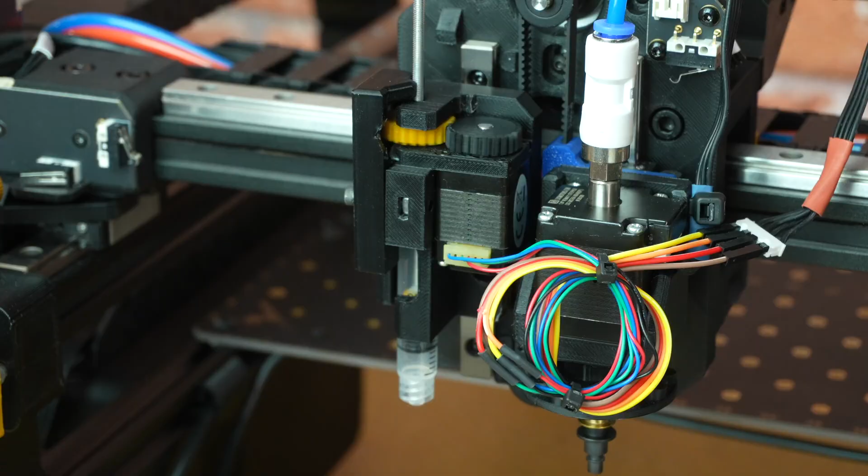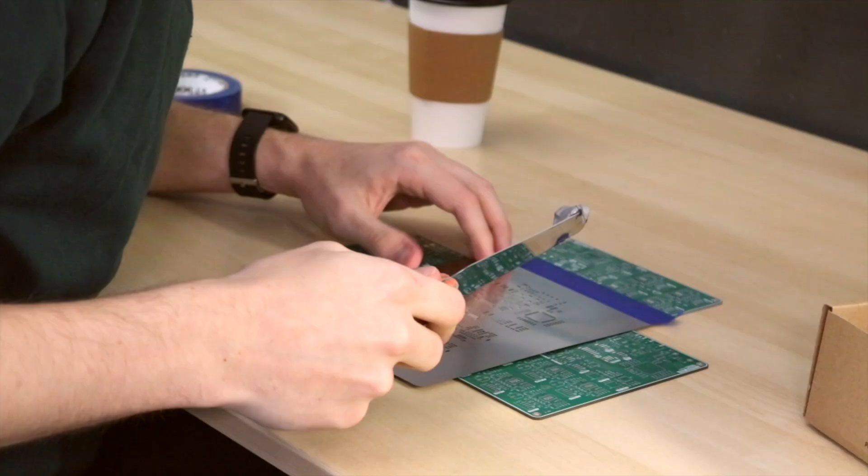I developed a tool head for the LumenPnP that can apply conductive ink automatically, but I think the most useful thing to dispense with this head is solder paste. Solder paste is tried and true for decades, the main way you should be connecting components onto a PCB. If I can adapt this tool head to work with solder paste, I can almost completely automate the PCB assembly process.

The last one I designed was okay, but it didn't have nearly enough oomph. The stepper motor that I used was pretty small. I only used a 1-to-1 gear ratio on the gears that actually drive the ink. Ideally, I give a little bit of a mechanical advantage here, giving myself a little more torque for actually extruding. And solder paste is way more viscous than this ink, so I'm gonna need all the power I can get from this. But I did learn a lot from making this head, so let's make one that's a little bit beefier and is gonna be able to extrude solder paste.

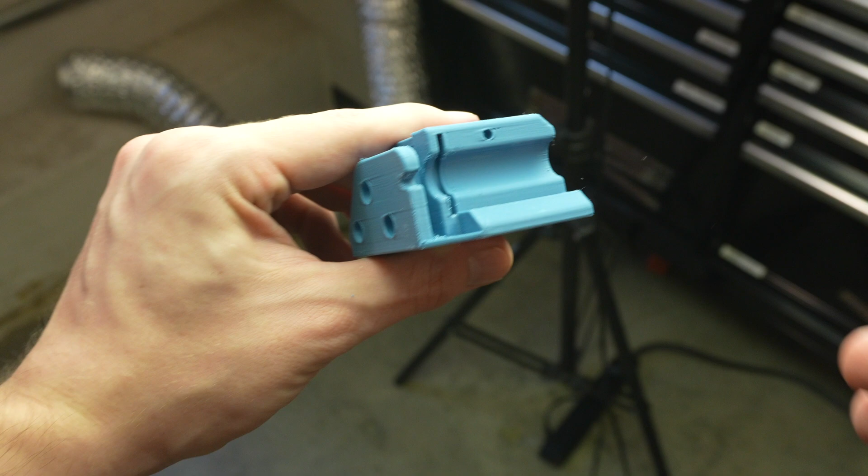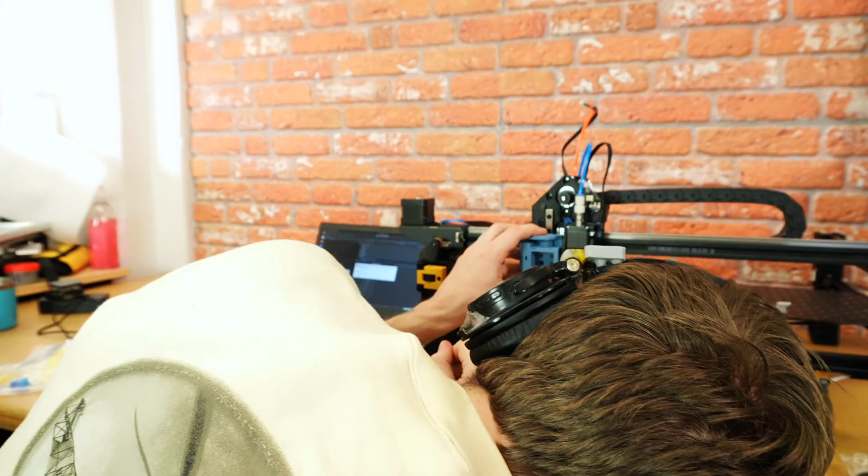Am I an idiot? I'm an idiot.

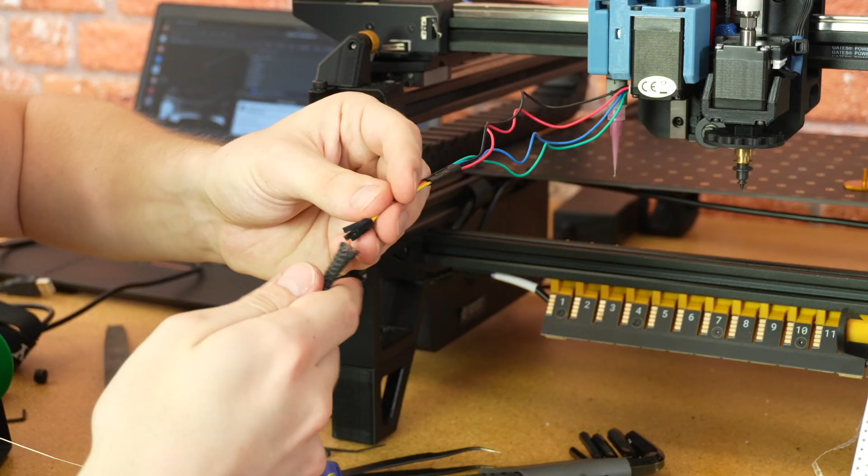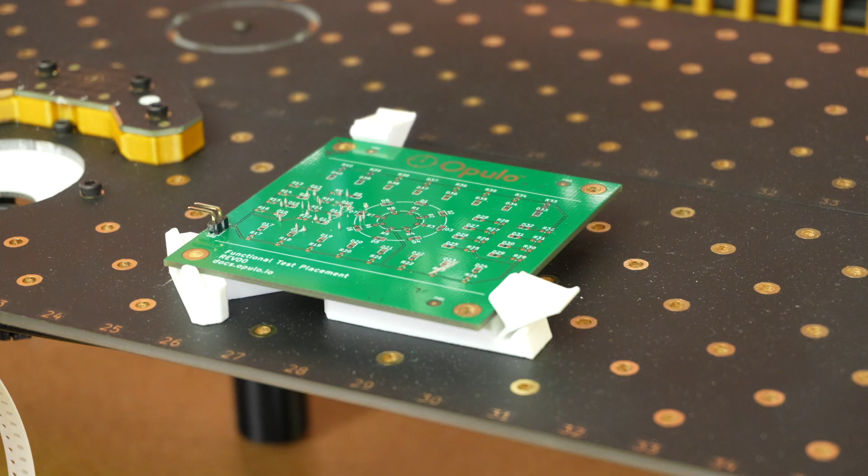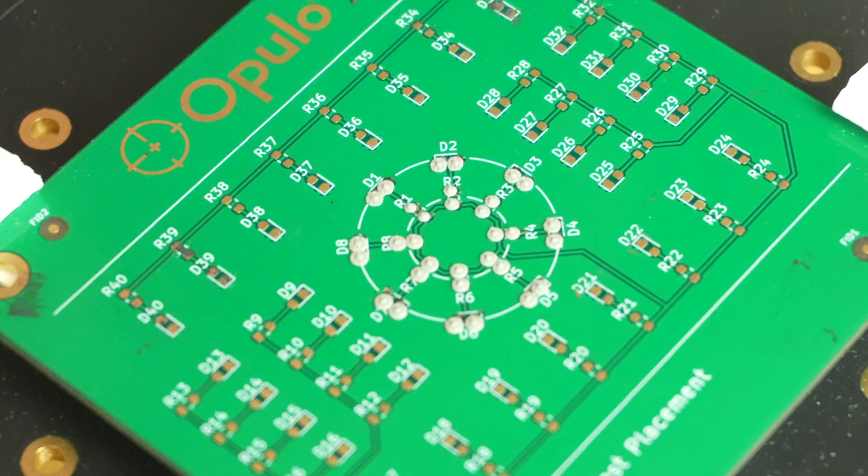And it's offset by a lot. Wow. That's so cool. Just need to extrude less, and I think I need to prime more because R1 is that first one that I'm doing, and that one looks closer to good, so I think I need to hit steady state earlier with my prime, and then as I'm actually extruding, I just need to be quicker about it.

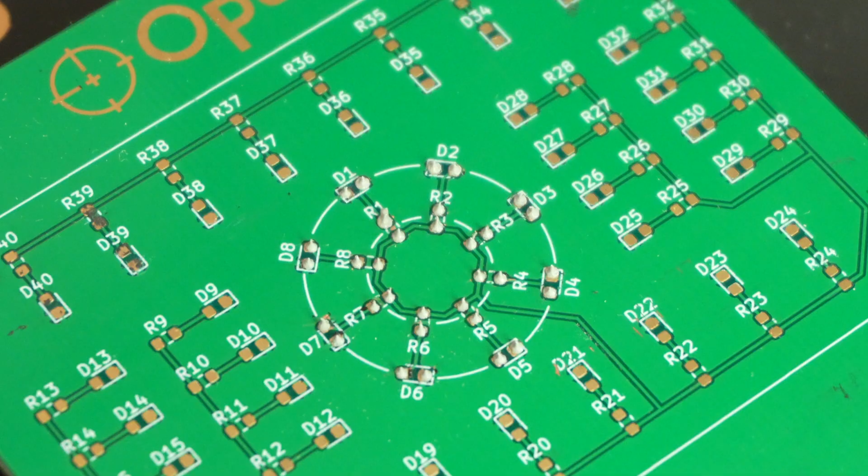Holy crap. That's it. After a bit of process tuning, it's pretty consistent. It's a really good thing I added that mechanical advantage and a bigger motor because it was fighting a little bit at the beginning. I had to up the current just a bit from the default current that we use for the Lumen on its normal motors, but still well within the boundary of what this motor can handle. And the mechanical advantage with the gearing helps a ton too. So now it's no problem to extrude this paste out.

I'm using Loctite GC10, which, by the way, is the best paste you can get. Room temperature stable, lasts for years as long as you don't expose it to a lot of air. Great reflow. Highly recommend. And it extrudes it out great.

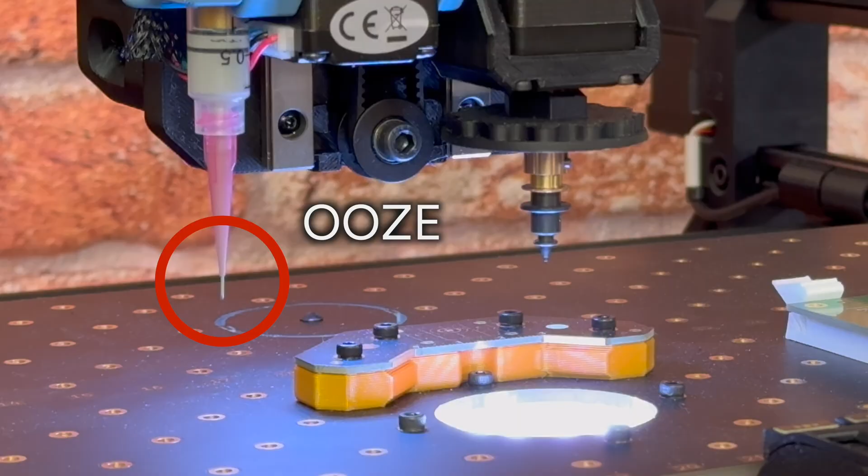I wasn't able to get all the air out of the syringe when I was loading it, which is really frustrating because when you have a little bit of air in the syringe, when you compress it, the air will actually compress and it acts kind of like a pressure spring. So even if you stop driving the plunger down, that air will still put a little bit of force out on your paste and you'll get kind of like a drip, an ooze that you'll see in a 3D printer nozzle. And the less air you have in the syringe, the less of that effect you get.

So what I'm doing right now is I'm just kind of purging the nozzle to start. I extrude a whole bunch, I have some come out, I clean the nozzle and I let it delay for a little bit to let most of that pressure work its way out. And then I move to each position, extrude a little bit, wait just a second, and then I go to the next one and I kind of have this running active pressure in the syringe. Ideally, it's a little more deterministic and there isn't this spring variable in my equation of calculating volume based on extrusion distance. That would be nice.

Eventually getting these syringes packed solid with solder paste I think will help reduce this, and then it can be tuned way more accurately and consistently. But this is just me trying to shove a bunch of paste in there. It's not gonna be that great.

So the next logical step at this point is we put parts on it afterwards, and then we reflow it all in one fell swoop. I'm imagining a little Python utility that you can drop your KiCad file into. It pulls out all the positions, and then it gives you a little script you can run for your Lumen to automatically apply your paste. So if you wanna really quickly iterate on getting some boards in, you don't wanna have to deal with a stencil, getting it aligned, doing all the squeegee stuff. You just slap it on your Lumen, it puts all the paste out on it for you. Bob's your uncle. That is just the coolest thing. That is the coolest thing.

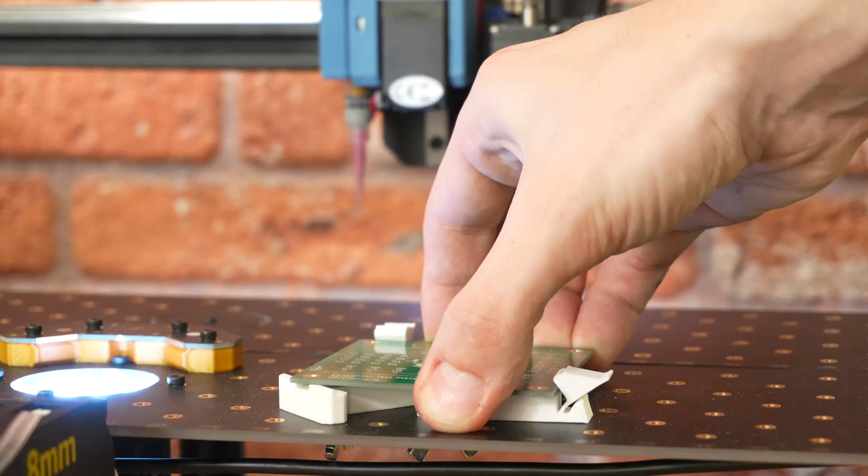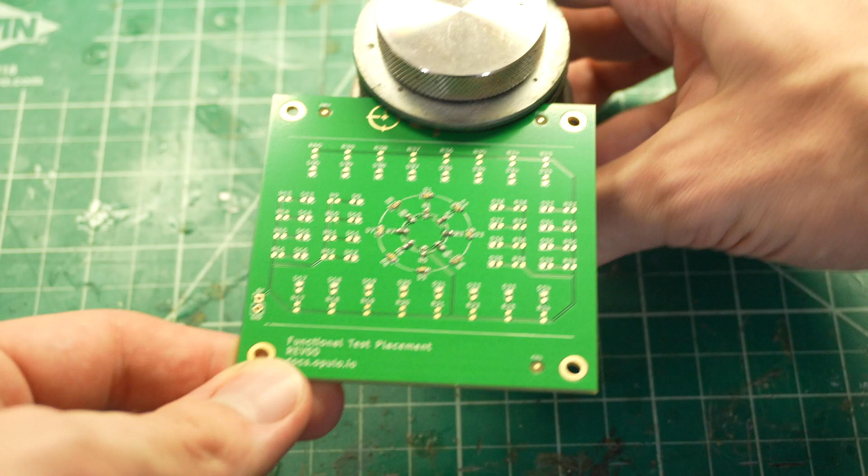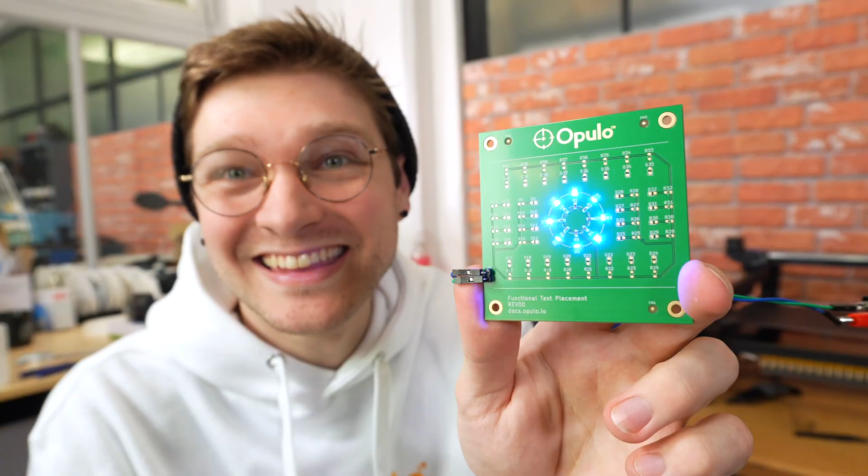This is now what I feel like is the culmination of a 3-video arc. This is a PCB that was fully pasted and placed on one machine with parts that are not coming off. They are soldered on with production solder paste. With some tuning of the process and some software to automatically generate the G-code, this is fully automatic paste and place. One machine. You can get PCBs made in 24 hours.

There are some caveats in that now there's only one nozzle, but that's not the end of the world. It's pretty easy to just swap out a nozzle tip halfway through the job, and it's still way more hands-off than having to deal with the whole stencil setup. I've just been testing this with 0603 pads. I don't know how well this would work with like a TQFP footprint. With a smaller opening tip and a fair amount of tuning, I think it could be pretty good.

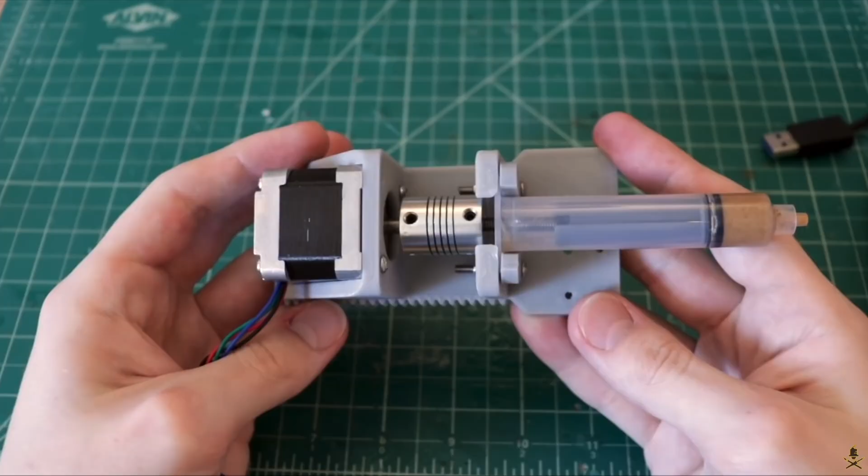Some of you might remember this, but years ago, I actually did a video of putting a paste extruder onto the earliest versions of the Lumen when I was still in very early development. And one of the reasons I really was hesitant to do it with solder paste was because you're supposed to refrigerate solder paste. And then as it's in the tube and it warms up to room temperature, it changes its viscosity. So you have to deal with a constantly changing material while you're trying to extrude it. And that was a real pain in the butt.

GC10, this solder paste, which is everything we use here, it's a really excellent solder paste, is room temperature stable. So you can tune it for this paste and it's not gonna change. That really changes the game in my mind of not having to have these dynamic, constantly changing extrusion parameters based on the temperature. None of that. It's just set it for room temp and move on.

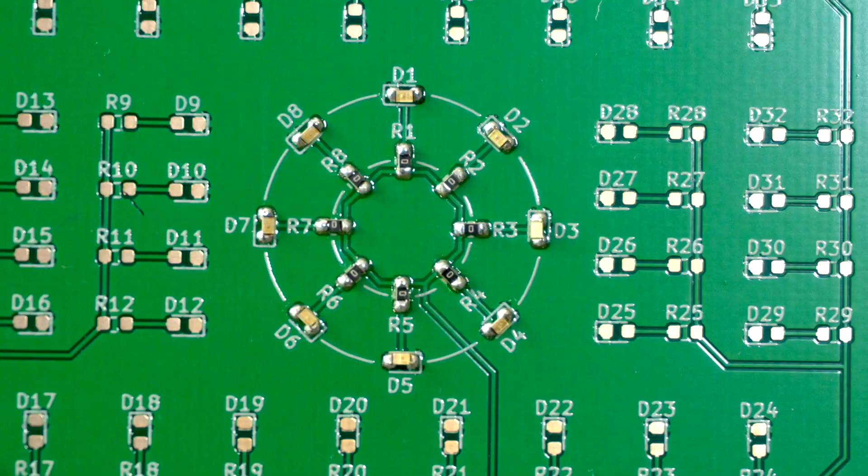I definitely extruded too much solder paste. You can see on the board, it's pretty blobby around each connection. So ideally it's quite a bit less paste coming out, but that's an easy parameter to tweak. I could get that with another hour of messing with this. Now this is working pretty darn well.

But yeah, the Lumen could do it all now. It could do paste, it could put the parts on. Now we just need to embed a hot plate into the staging plate. So after it's done putting all the parts on, it will reflow in situ. How cool would that be? That would be sick. That's so freaking cool.